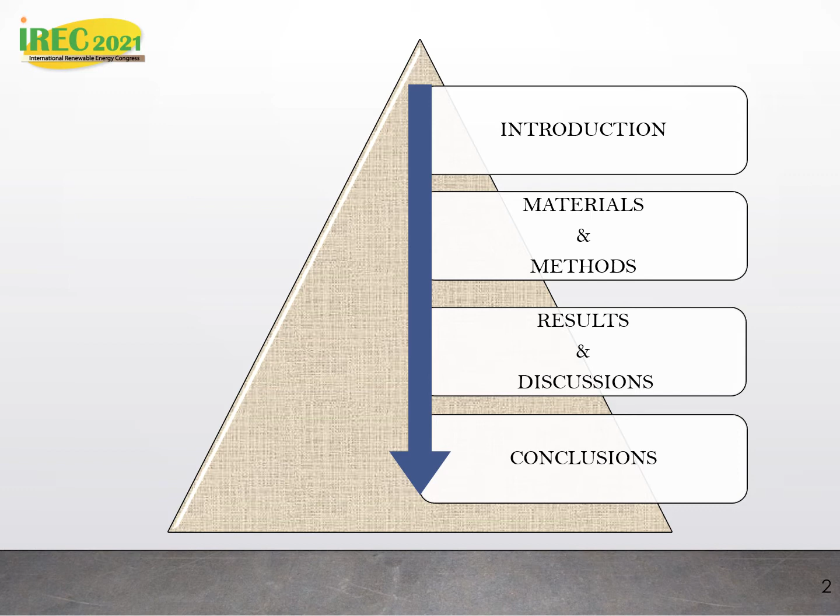We're going to look at the different parts of our paper: the introduction, materials and methods, results and discussion, and conclusions of our research. Here is the overview of the work.

TE heat pumping was incorporated into the solar air heater, and we experimented with the prototype in an indoor and outdoor setup, evaluated the performance parameters, and compared them with a conventional solar air heater.

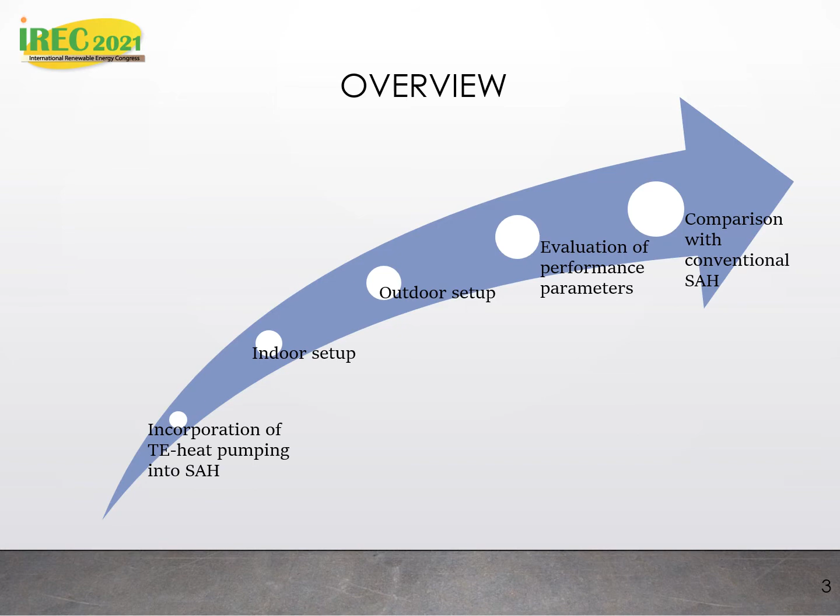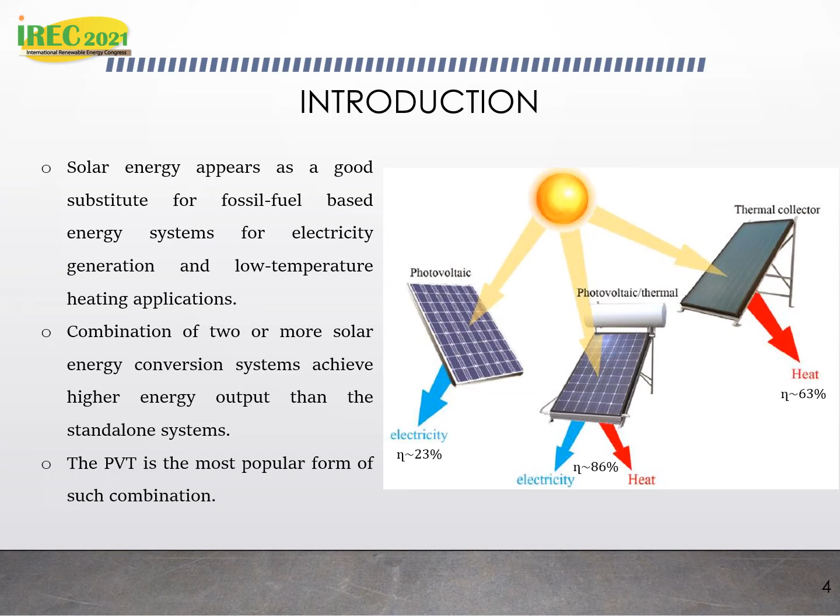Solar energy appears as a good substitute for fossil fuel-based energy systems for electricity generation and low temperature heating applications. As reported in the literature, a combination of two or more solar energy conversion systems achieves higher energy efficiency than standalone systems, and the photovoltaic thermal system is the most popular form of such combination, with its output made of electricity and heat, achieving higher efficiencies than either the PV alone or the thermal collector alone.

Thermoelectric generators have also been incorporated or combined with solar energy systems to produce electricity or improve the electrical output of PV modules. TE modules were used with flat plate collectors to produce electricity, generating power by virtue of a temperature difference between the absorber plate and the vacuum enclosure at lower temperature.

Also, the irradiance incident on the absorber plate could be concentrated using Fresnel lenses, as shown in the middle of the slide, to improve the hot side temperature of the TE module.

Those TE modules could be attached at the back of the absorber plate to use the temperature difference between the plate and the ambient to produce additional electricity, which added to the electricity output of the PV module improves the energy output of the whole system.

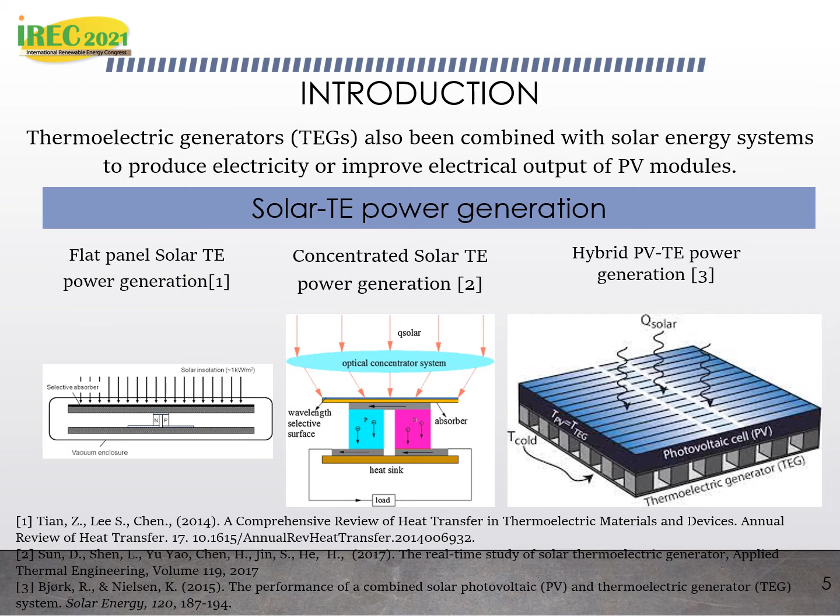TE modules could also be used as coolers. When powered by PV modules, they perform heating, cooling, PV cooling, or water condensation. So we have here some examples of those systems.

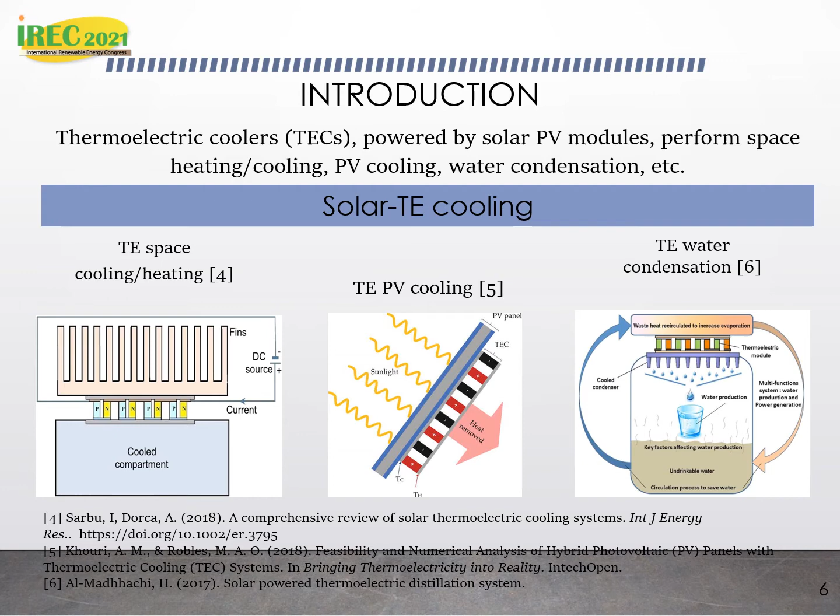As shown by the previous literature, we found that most current solar TE applications have been used with the aim of improving electrical energy output, either directly from solar radiation or additionally with PV modules. TE coolers have also been used, powered by solar PV modules, to perform different heating or cooling tasks, including PV module cooling, but they have not been implemented in research with the aim of improving heat collection.

So this study aims at incorporating TE heat pumps into a solar air heater with the aim of improving the heat collection in the solar collector.

Materials and methods. We compare here the proposed system to a conventional system. In the conventional system, elevated temperatures in the absorber plate cause significant losses and reduce the energy output of the solar air heater.

But in the proposed system, the TE heat pumps will be powered by the PV module to pump heat from the absorber plate, lower its temperature, reduce the heat losses, and improve the heat collection of the collector.

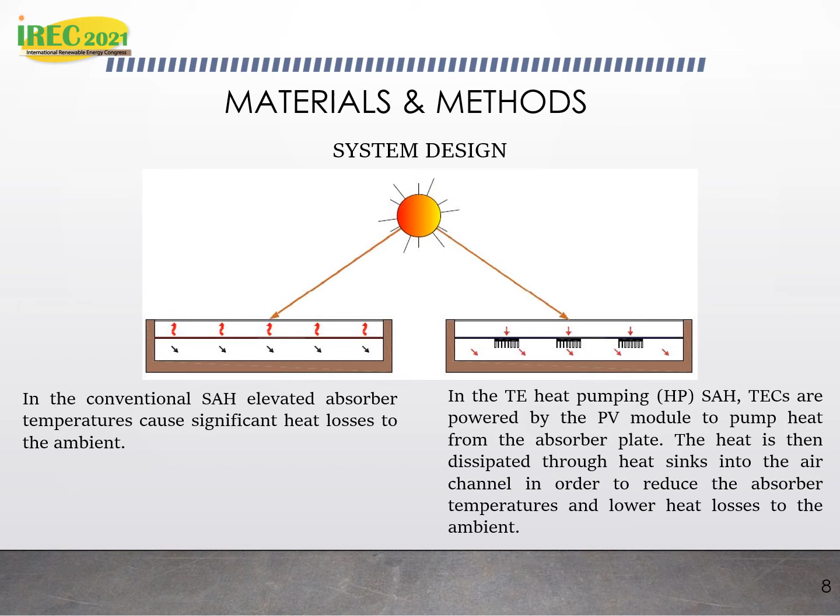So four TECs of the type TEC1-12706 were attached at the back of the absorber plate in the thermal collector, with some heat sinks for effective heat dissipation into the air channel.

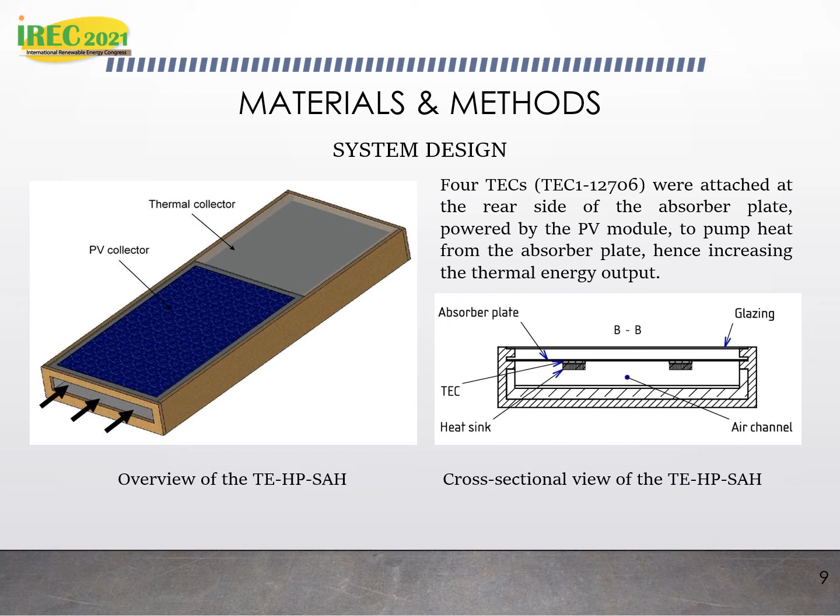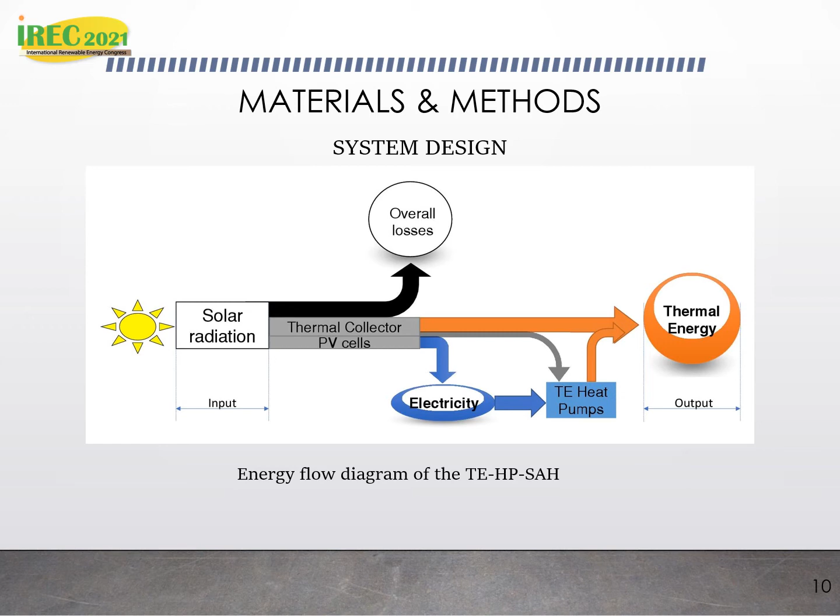This system has been constructed with the materials presented here, namely a glass for cover plate, casing which is wooden, the absorber plate which is in galvanized metal sheet, the insulation, the TE modules, and also the PV module. We can see on the right side the even distribution of the TECs at the back of the absorber plate.

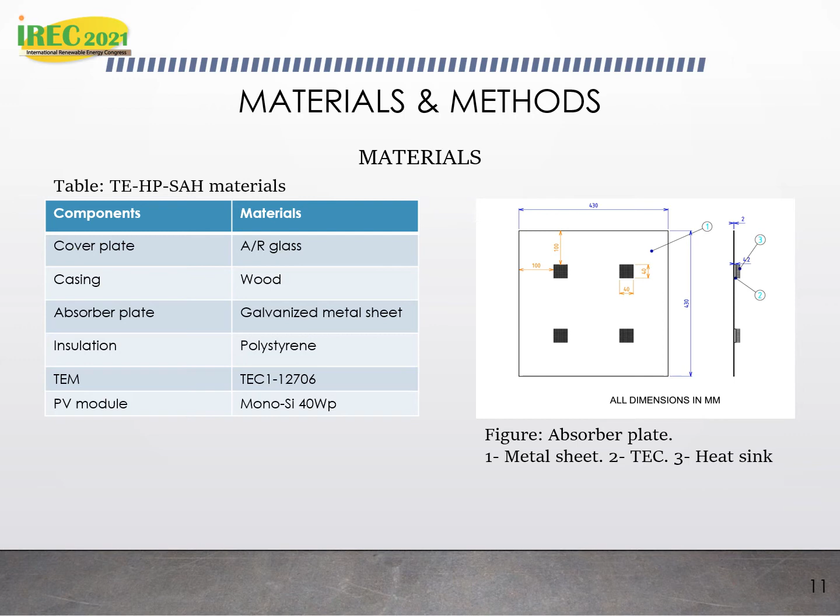The materials and methods used: first of all, an indoor experiment with simulated radiation using incandescent halogen lights, and the TEC is powered with a DC source, so as to get a controlled input to the system.

We also experimented with the same prototype under real sky conditions, with the PV module attached to the collector, which produces electricity to power the TECs at the back of the thermal collector.

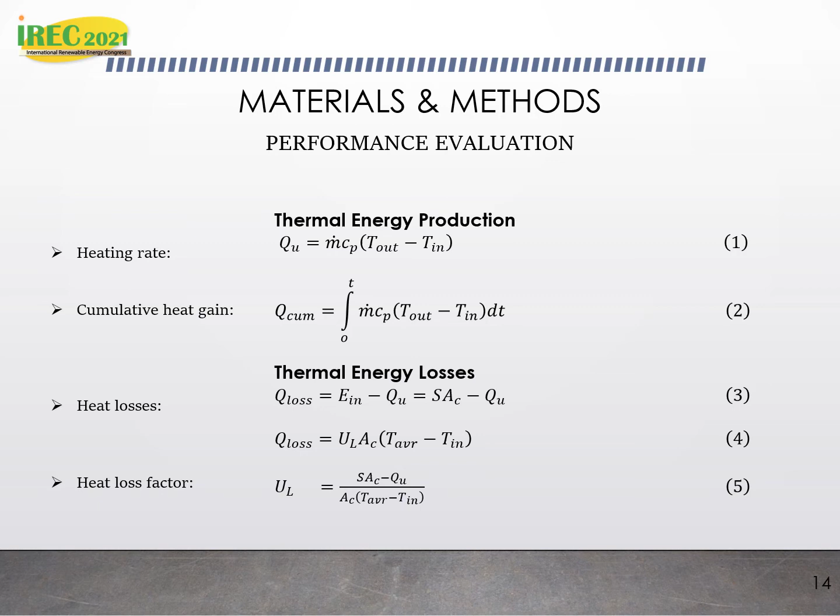The same data were collected both in indoor and outdoor experiments, and were fitted into empirical relationships to determine the thermal energy production, the thermal losses, the heat loss factor, the energy efficiency, and also the heat removal. Results are grouped into indoor and outdoor tests.

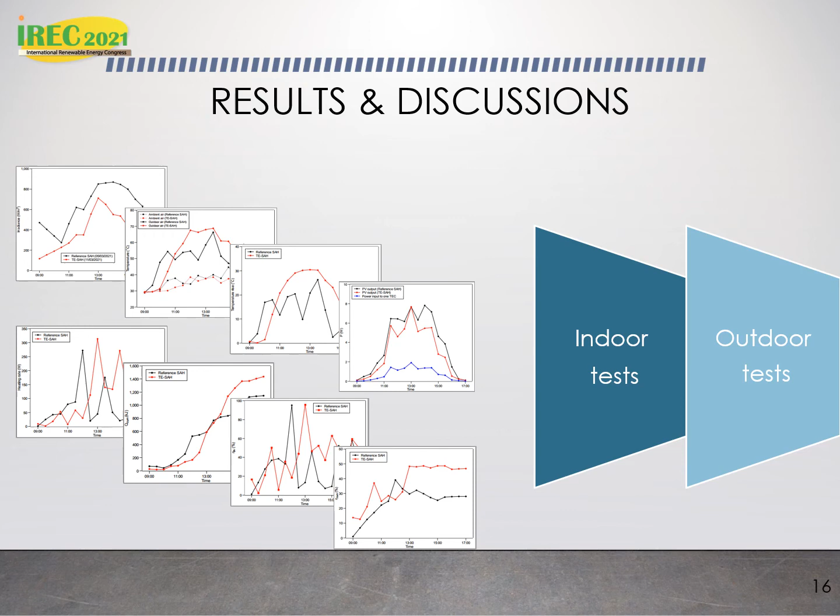We can see the difference between the outlet air here, with a constant radiation of 900 watts per meter square, which was steady throughout the experiment. As shown on the graph on the left side, the temperature at the outlet for the TE heat pumping solar heater reached higher values than the conventional solar heater. The same is depicted on the temperature rise, that is the temperature at the outlet minus the temperature at the inlet, which was increased by 7 degrees Celsius with application of TE heat pumping.

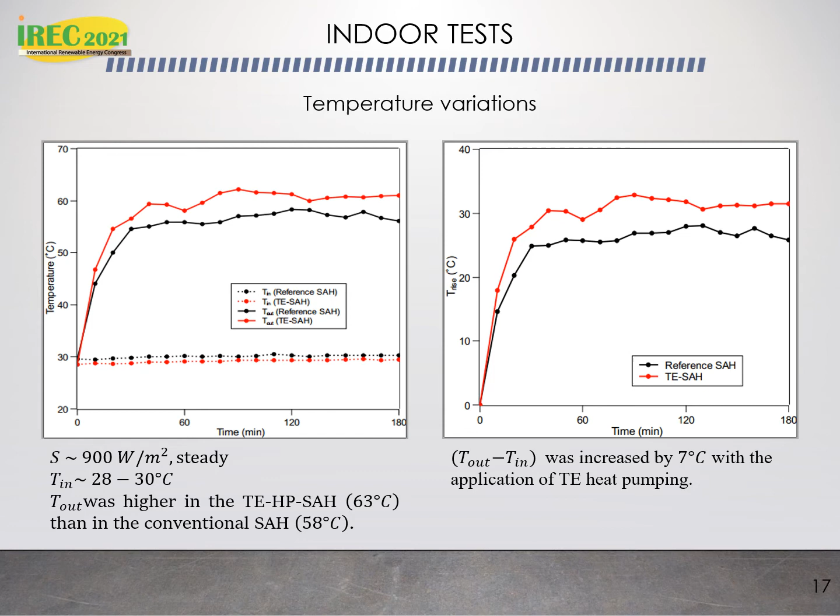Also, the heat collection was higher in the TE heat pumping, and reached a maximum value of 120 watts against 85 watts for the conventional solar air heater. Over the duration of the test, we had an addition of 5.1 kilojoules, which represented an increment of 45.9% relative to the conventional solar air heater.

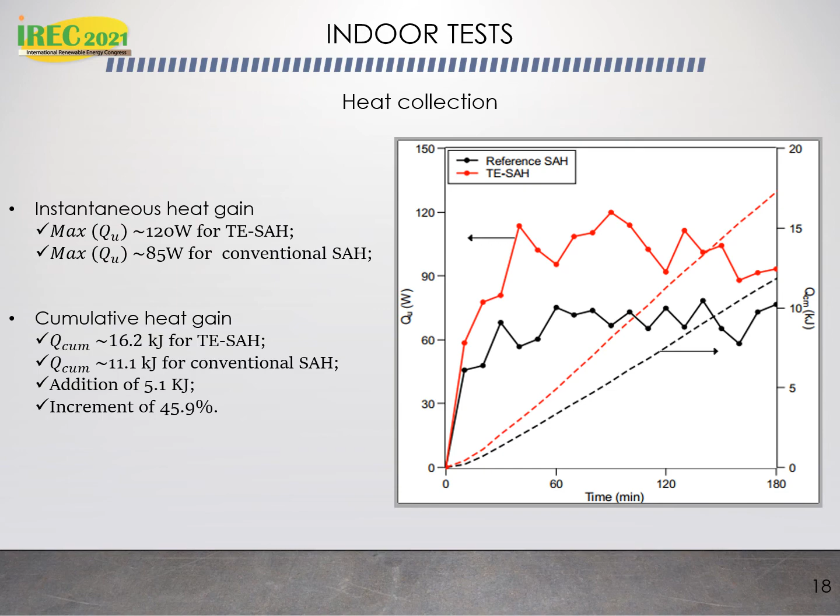Also, the heat loss factor, the heat losses were reduced by 47%, and also the heat loss coefficient was reduced by 47%, and the heat losses were reduced by 34.23%.

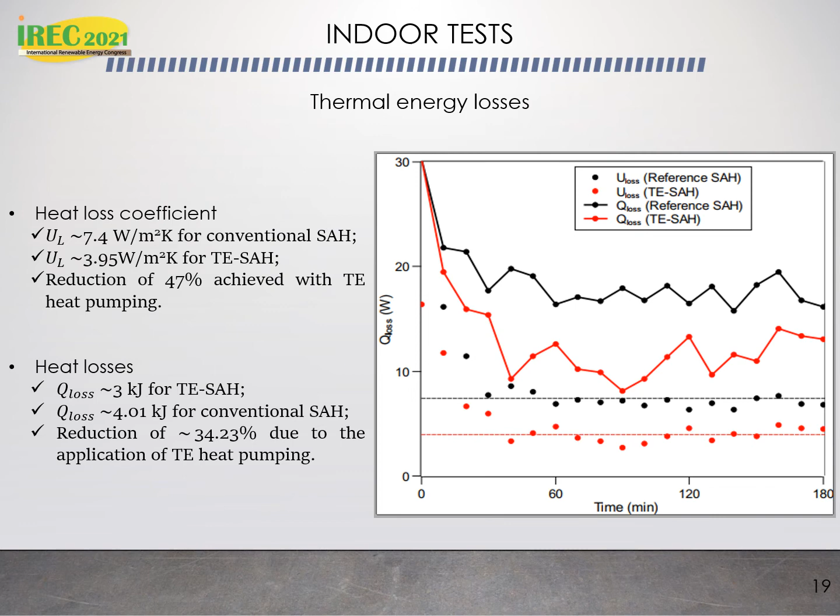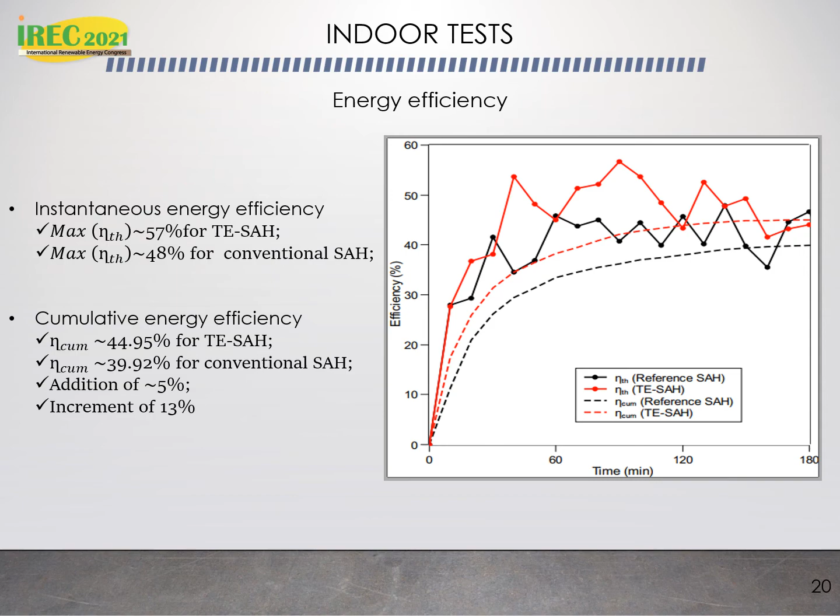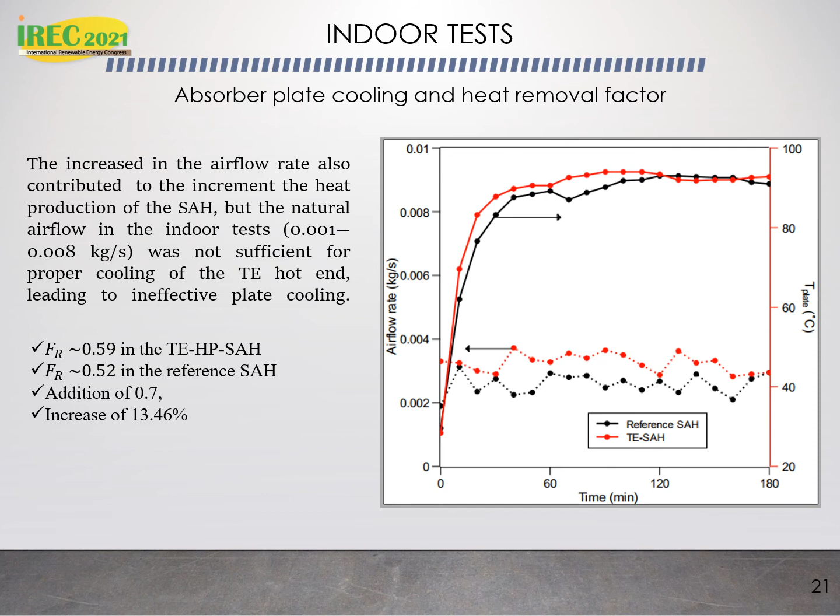The energy efficiency also was increased by 13% in the TE heat pumping solar air heater. We also found that the heat removal factor was 0.59 in the TE heat pumping solar air heater against 0.52 in the reference solar air heater, with an increment of 13.46%. Outdoor test: here we can see the test conditions where the irradiance during the test with the conventional solar heater was higher than that during the test for the TE heat pumping solar air heaters.

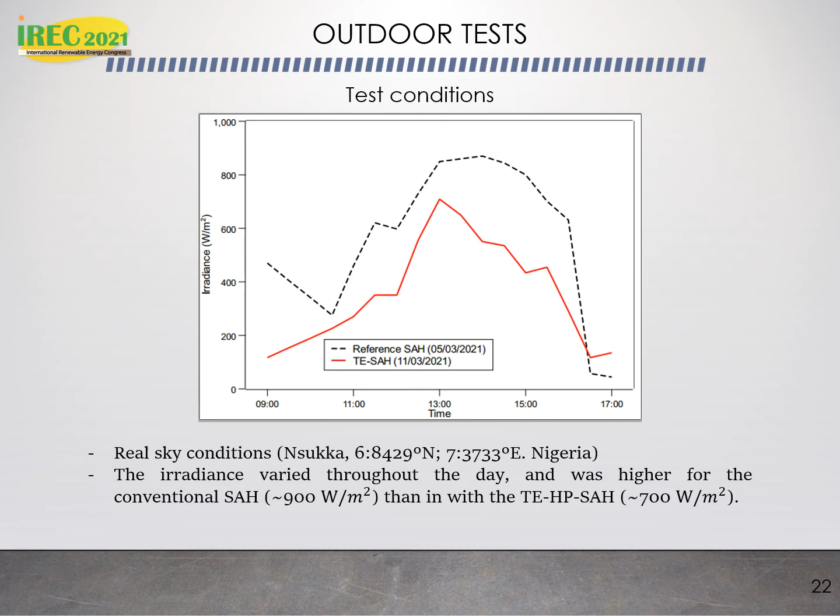Despite this difference, we can also see that the outlet temperature as well as the temperature rise were both higher in the TE heat pumping solar heater than in the conventional solar air heater.

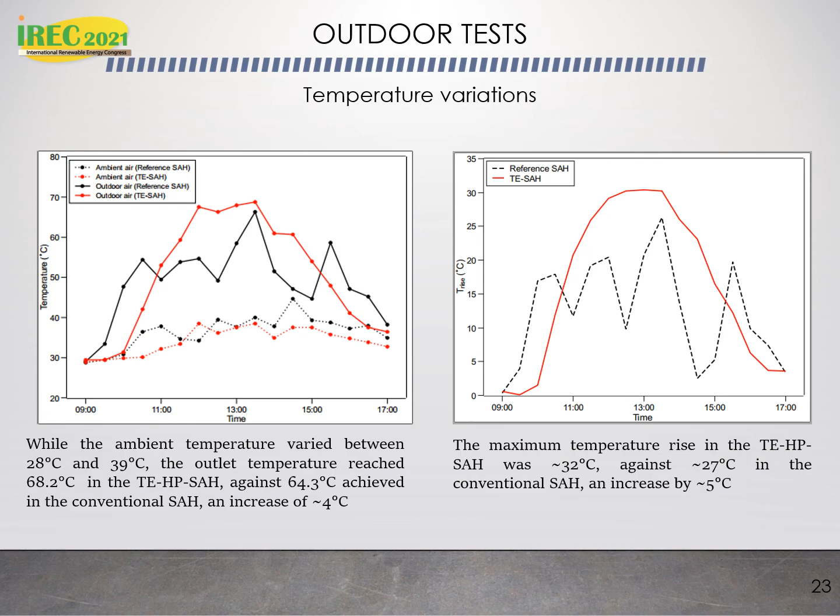Also, the heat collection was increased in the TE heat pumping solar air heater, especially during the sun peak hours, where the PV module output was at its peak during those hours, increasing the power input to the TECs, hence the TE heat pumping output. Higher temperatures were then availed at the hot side, at the hot end of the TE coolers, allowing more heat collection by the working fluid.

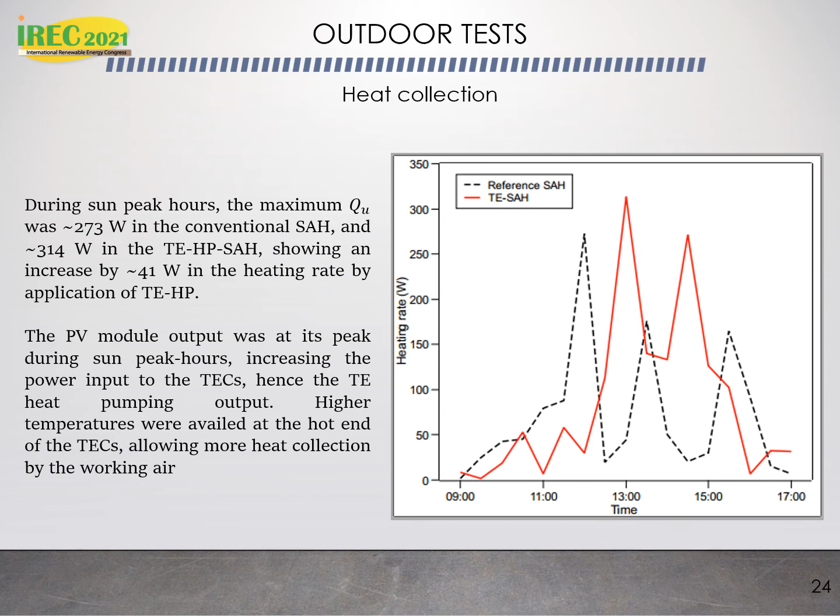Over the duration of the test, the increment in the heat gain was by 0.5 megajoule, which corresponds to a 22% increment relative to the conventional solar air heater.

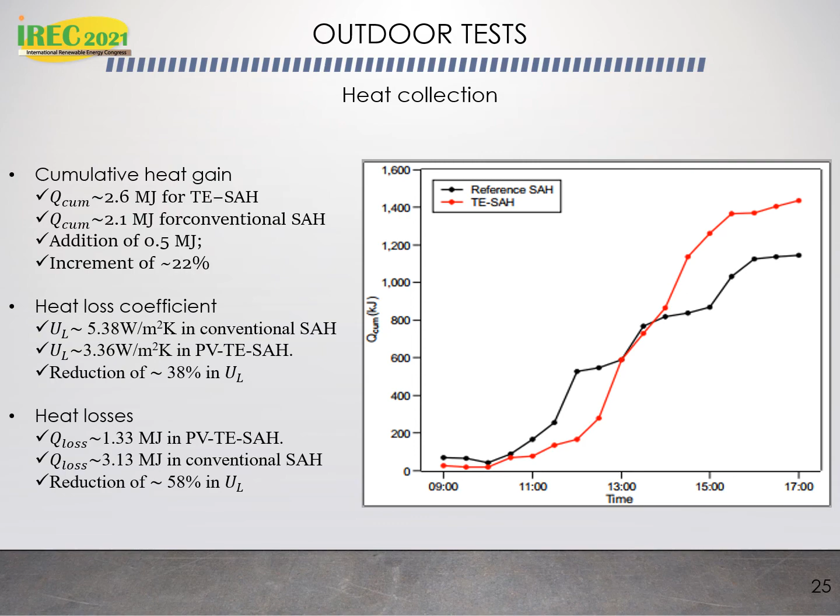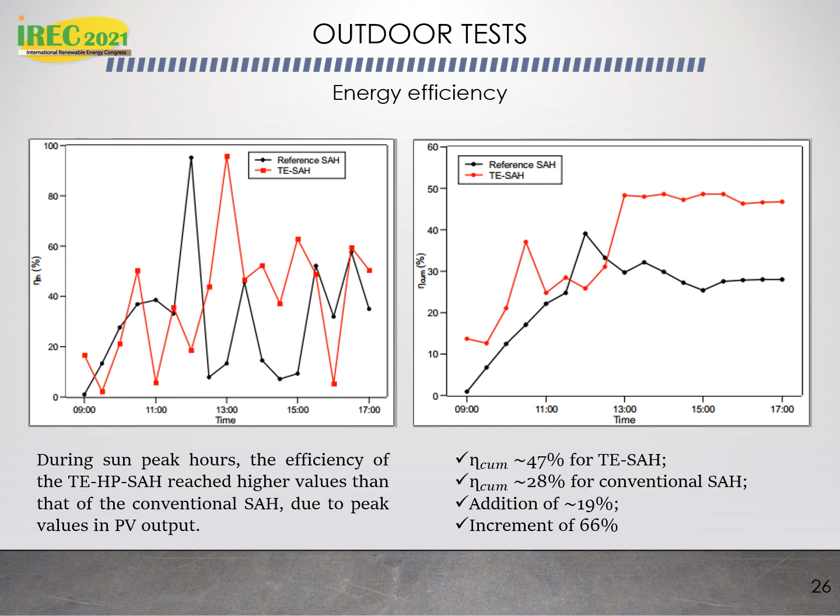Also, the heat loss coefficients were reduced by 38%, while the heat losses were reduced by 58%. The energy efficiency was also higher during the sun peak hours, and over the duration of the test, the conventional solar heater achieved 28% of cumulative efficiency, while the TE heat pumping solar heater achieved 47% of efficiency, which corresponds to an increment of 66% relative to the conventional solar heater.

Also, we could see that the heat removal factor as obtained in the outdoor test was 0.59 for the TE heat pumping solar heater and 0.5 for the reference solar heater. Also, by increment of the airflow rate additionally to the heat pumping, the absorber plate was cooled, or had lower temperatures, as shown on this graph.

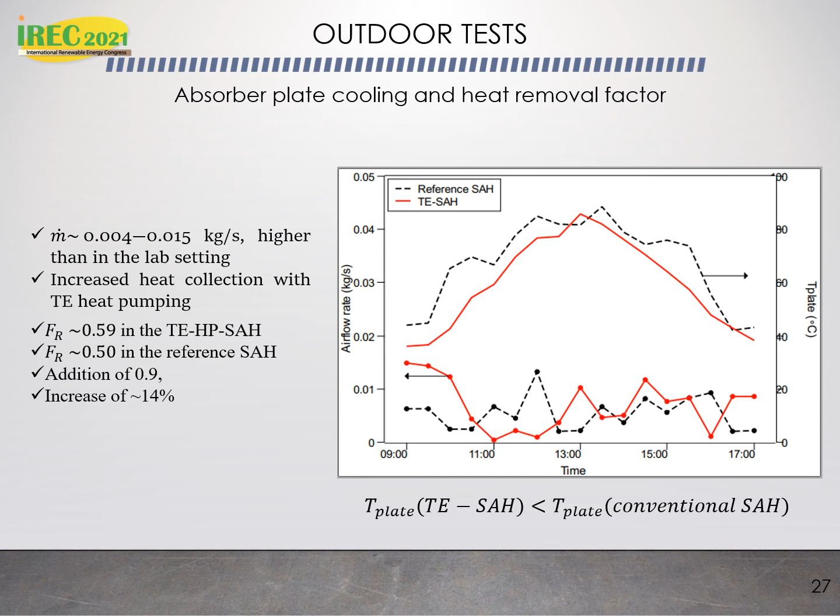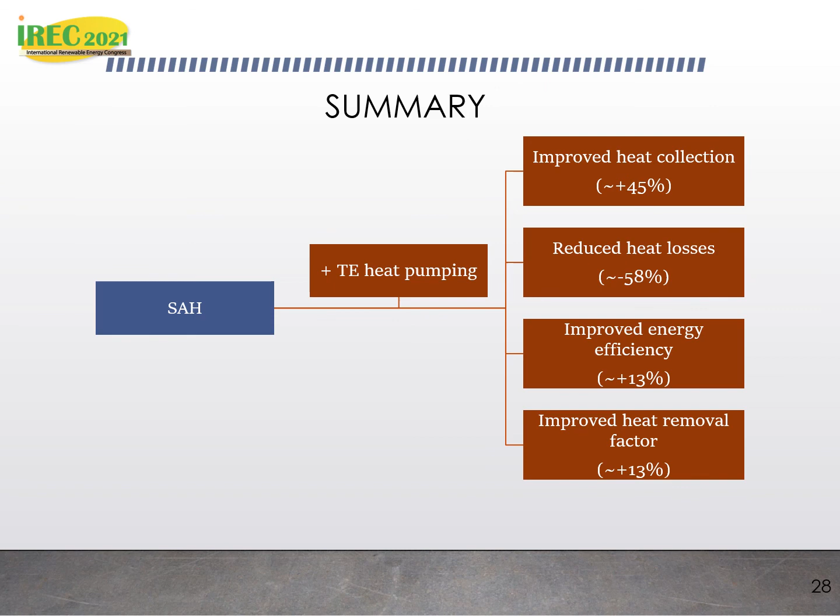So as a summary, we found that when we add TE heat pumping to a conventional solar heater, the heat collection was improved by up to 45%, and the heat losses reduced by up to 58%. At the same time, the energy efficiency was improved by up to 13%, and the heat removal factor was also improved by up to 13%.

TE heat pumping in this study was proven as a viable way of improving solar air heater performance, and both thermal energy production and energy efficiency were improved. The heat losses were reduced, and the heat removal factor was also improved. The absorber plate was cooled, and this increment was allowed by increase in the airflow rate additionally to the TE heat pumping.